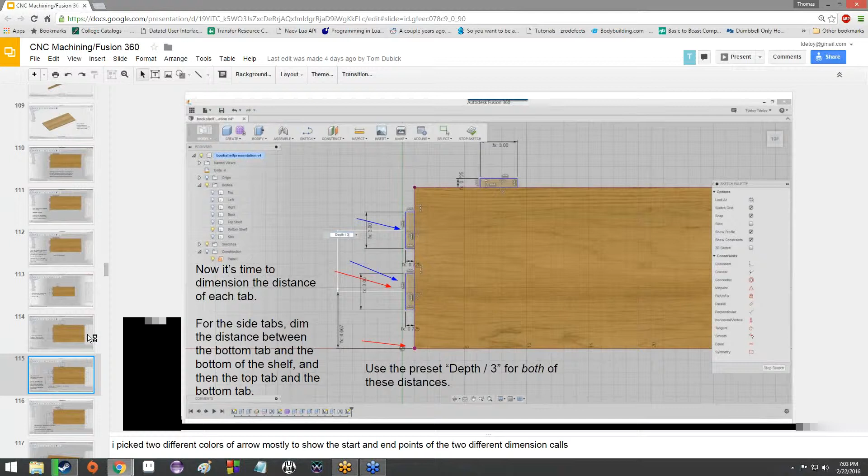And not just that, we mirrored it and we created the back tabs and the side tabs and brought out the things and cut all the holes. It was quite the ordeal.

As you can see, slide 160 exactly. There's a lot of slides in this presentation, and it's not entirely done yet. So it's like 240 so far. There's a lot to making this bookcase and getting it ready for cutting and everything. But it's mostly just because there are so many new concepts that are introduced.

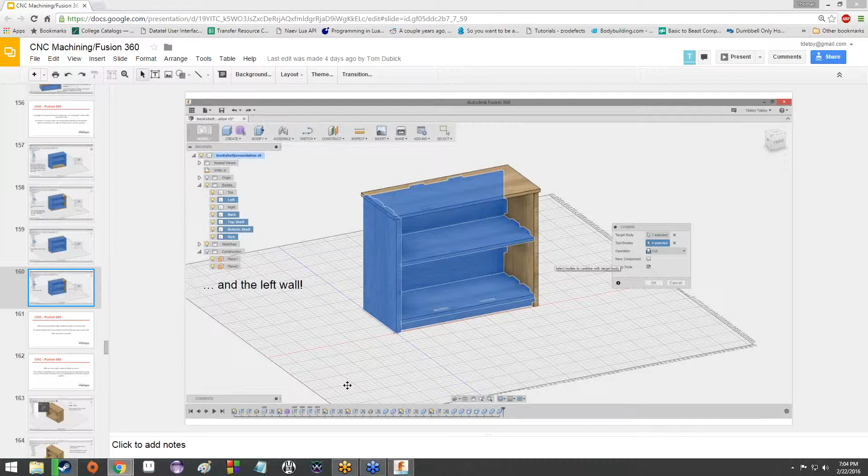All right. Fusion is almost started up. So once it does, eventually, we'll go ahead and open up the project we've been working on.

All right. So let's see here. We should be. Oh. It seems that mine did not save.

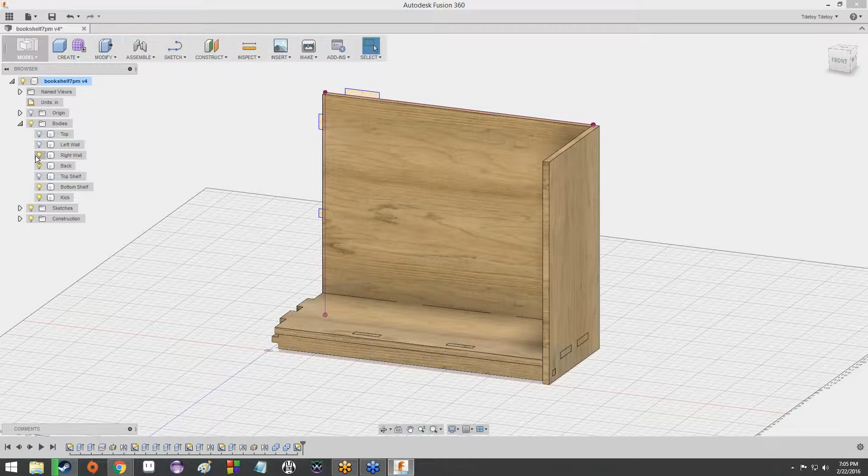All right, well, this is a good opportunity for a review. Let's see here. Looks like we don't have the back tabs or the side tabs on mine. Or I don't have the back tabs or the side tabs. I shouldn't say that about you guys. I don't have back tabs or the side tabs.

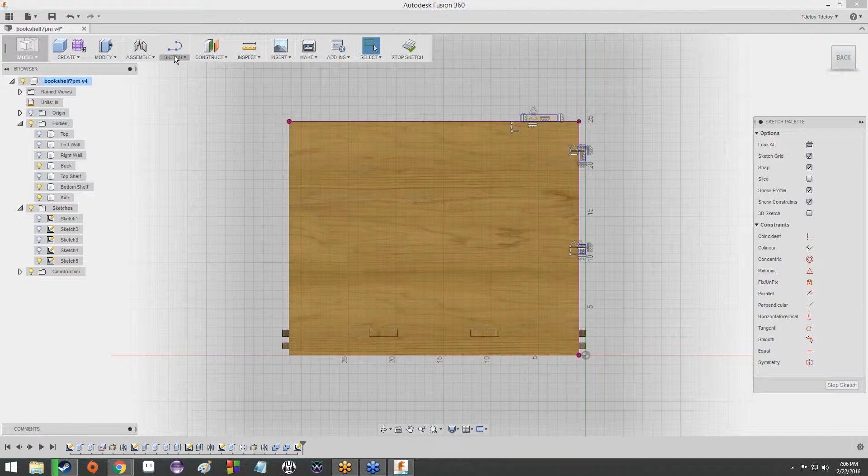Okay, well, let's spend some time reviewing. I can show you guys exactly what we did. So we'll dimension this stuff out as quickly as I can.

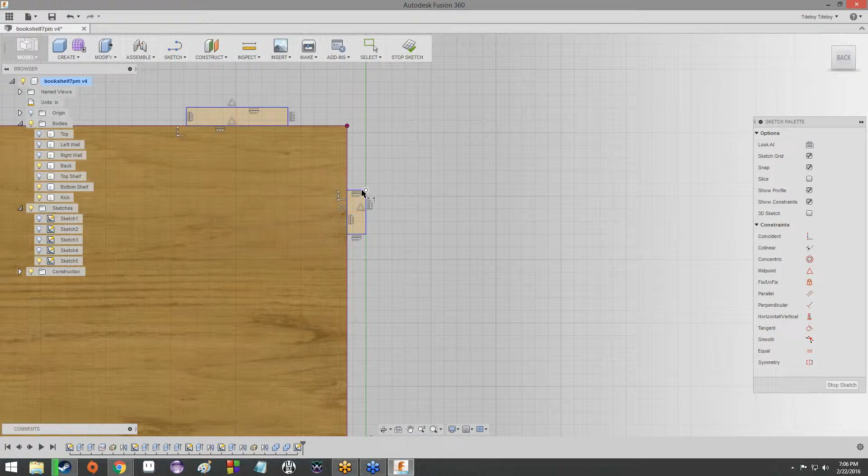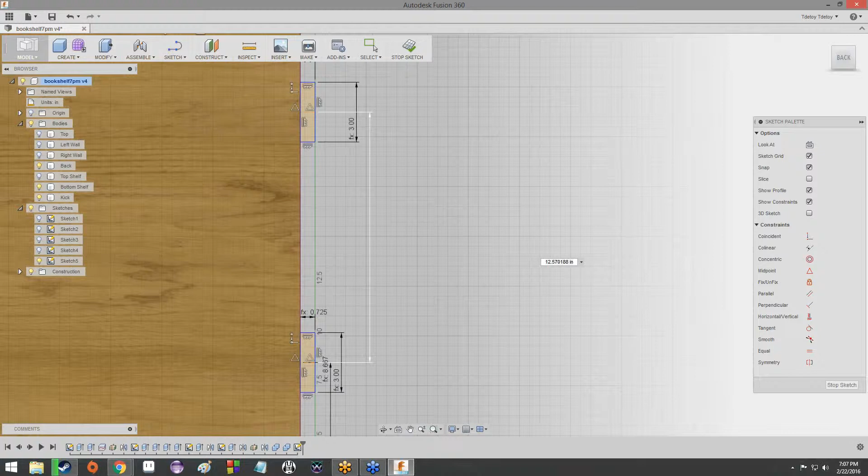All right. So remember that our tabs have, for the most part, been ply in their length. No surprise there, and they've also been tab in their width. With a lot of these, we've made them some distance away from each other. Usually it's the dimension that they cross. So like in this case, these are along the height of the bookcase. So in this case, it would be height divided by 3, like so. So these are height divided by 3 far away from each other, far away from the bottom, far away from the top, and they've been ply in length and tab in width.

Didn't really anticipate that this was not going to be saved. I apologize. So same deal up on the top. This one was tab in width. However, this one was blind tab in height. Because remember, we wanted it to be sort of sunk into the top, but not enough that you could see the tabs on the top. And then this was width divided by 3. Remember, this runs along the back of the bookcase, so we're looking at the width of the bookcase along this dimension right here, whereas this is the height of the bookcase.

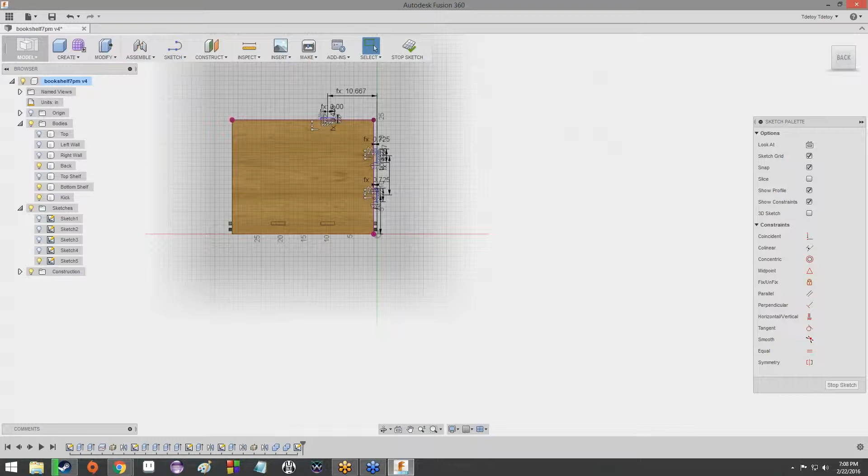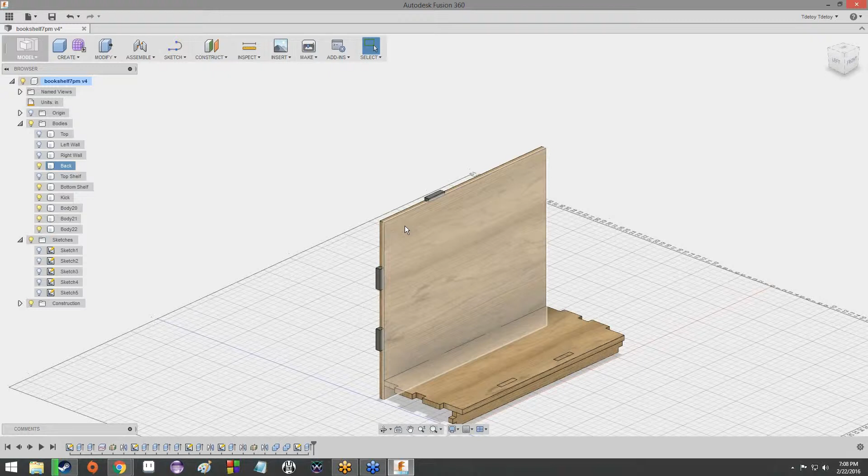And then after we did that, we just went ahead and extruded those tabs out to the other side, made them a new body, hit OK. So as you can see, the tabs now exist. Let me just go ahead and hide the other bodies. So the tabs now are here.

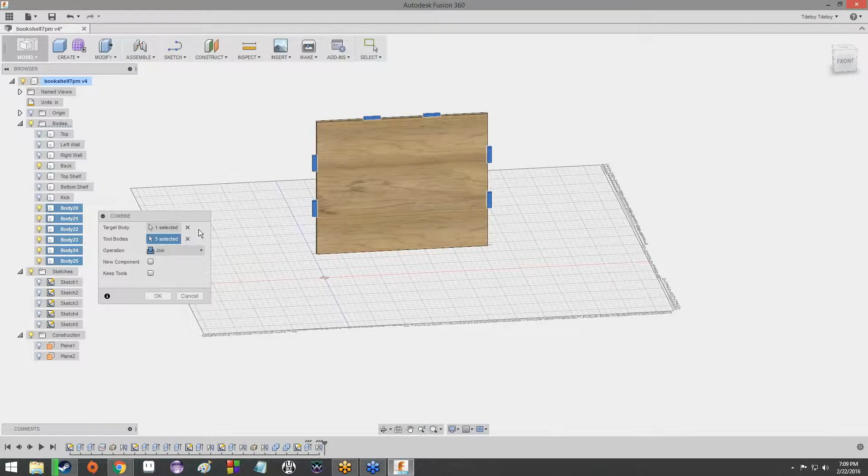And it was simply a matter of mirroring them over the other side. Mirror, mirror, mirror plane, we'd select the construction plane up here. They got mirrored onto the other side. And then, once that was done, all we had to do was just combine them. Whoops. And then join. Just like that.

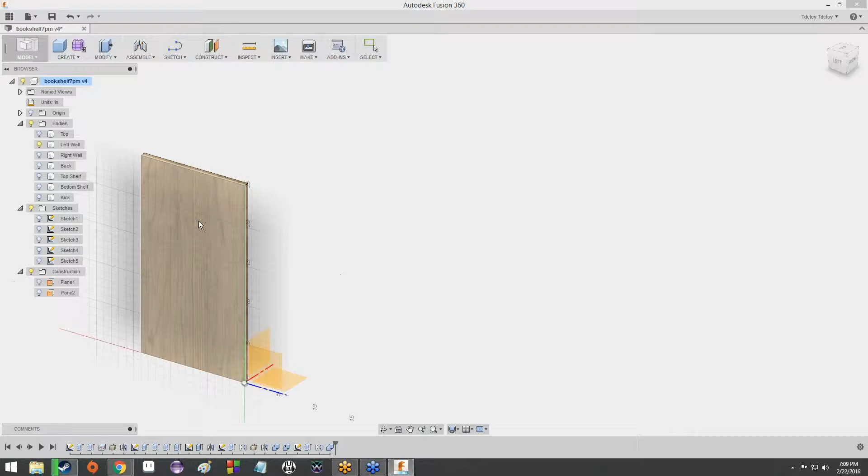And that was how we did tabs on things like the back. So if we were to do this left wall right here, because I still have to do that since it didn't save it, creating a new tab was simply a matter of creating a new sketch, drawing on some rectangles, as well as some midpoint lines, until I've done this a couple of times.

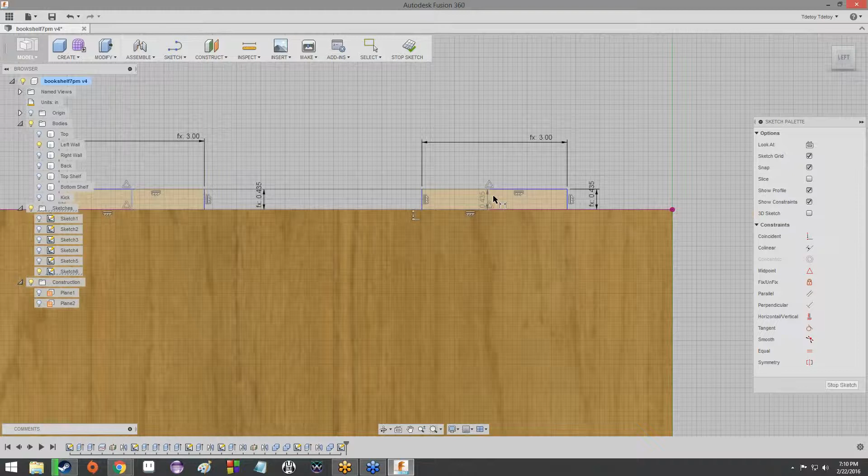Turning these into construction lines, and then dimensioning them appropriately. Well, if you remember, these were also a height of blind tab, because these are going into the top, and a width of tab. Now these were a distance of depth divided by 3 from one another. Because remember, this is the front of the bookcase over here, and then this is the back.

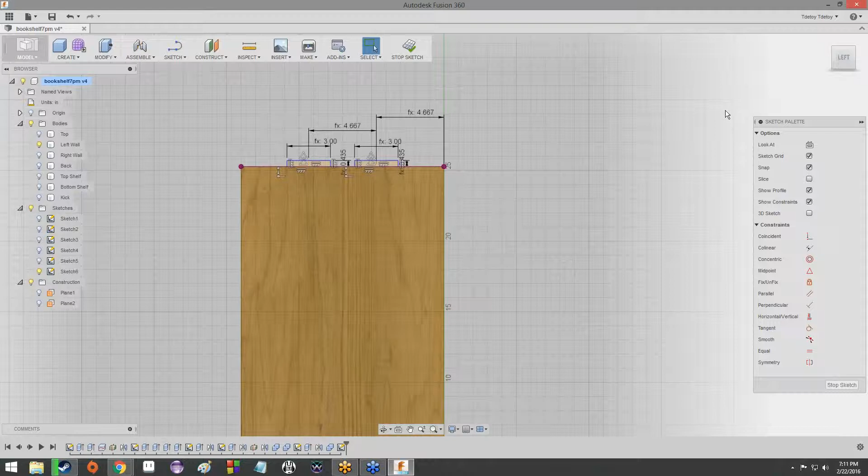And then thanks to the mirror function, we only have to extrude on one of these. So let's go ahead and extrude these 2 over here. Make it a new body, hit OK.

I apologize, this is probably not the most exciting thing. I didn't realize that it wasn't going to save.

Mirror these objects across the midplane, hit OK, and then combine them.

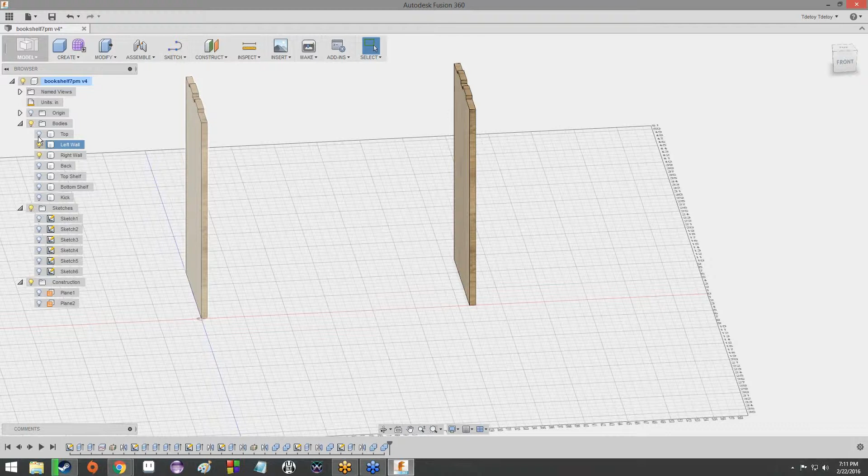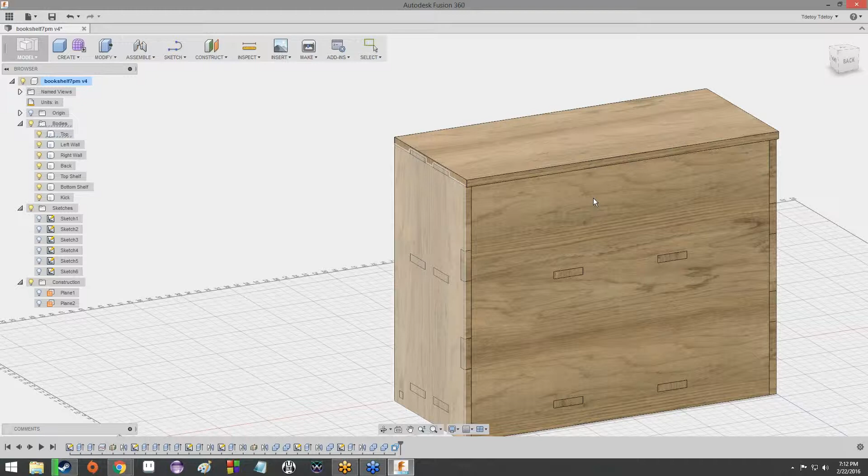And then once we created all the tabs, because that was all the tabs we have in this thing, remember there weren't actually any holes here, so there was material overlapping at these points. So first things first, let's go ahead and do a little bit more push-pull, press-pull. And it was 1/2 inch, so that we had some extra material to work with.

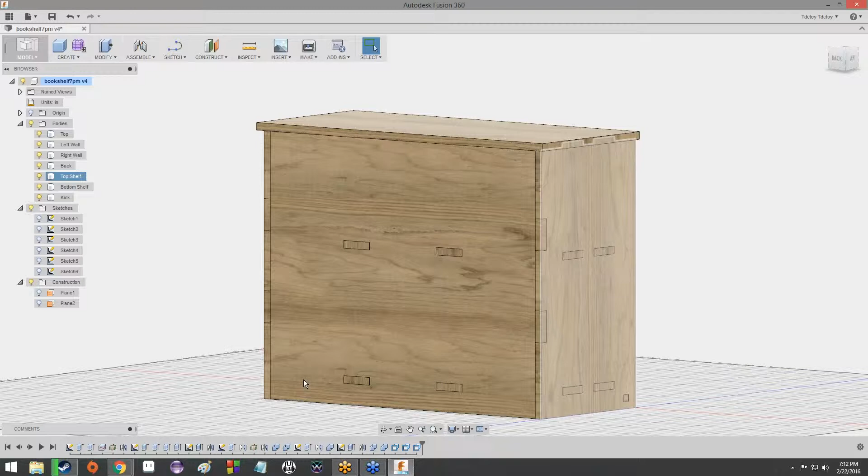And with that done, all we had to do was cut out the holes. Now, cutting out the holes, if you guys remember, was done with a combine function. However, it was a little bit wonky how we did that. You notice how we've got operation down here, we changed it to cut. So the target body in this case would be whatever is getting holes cut out of it.

So the target body here would be the bottom shelf, if we wanted to cut the holes for the kick plate out of it. Tool body in this case would be the kick plate, and we wanted to make sure we kept the tools so that the hole would be cut.

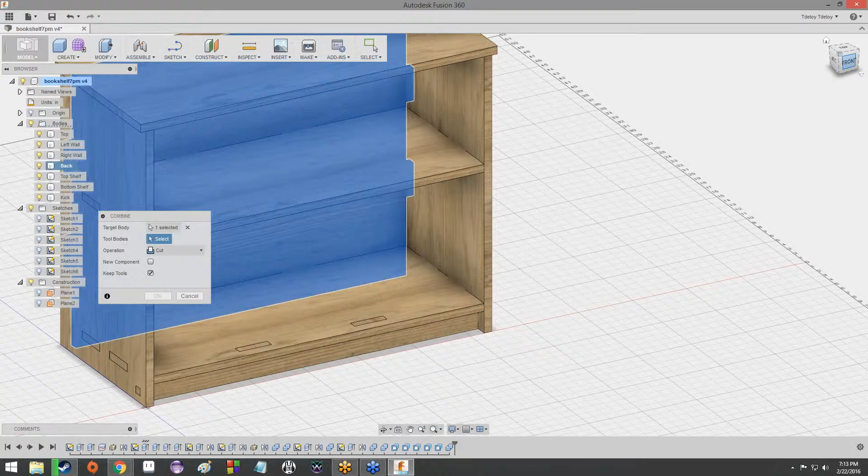Now if we were to hide the kick plate, you can see that there are holes cut into the bottom shelf because we used that cut command. And then that process was simply repeated across everything that cut holes into it.

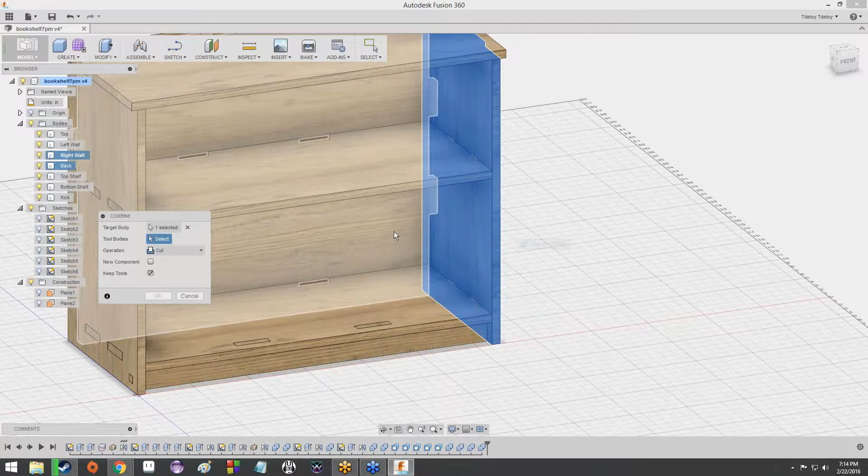Okay. Okay. Okay. Oh, whoops. Right. And then finally.

Okay, so now let's double check everything. If we did everything right, if we hide some of these areas, we should see that there are now holes in them, and there are.

So let's hide everything except for the top. Top has holes in it, perfect. The left wall and right wall have holes in them. The back has holes in it.

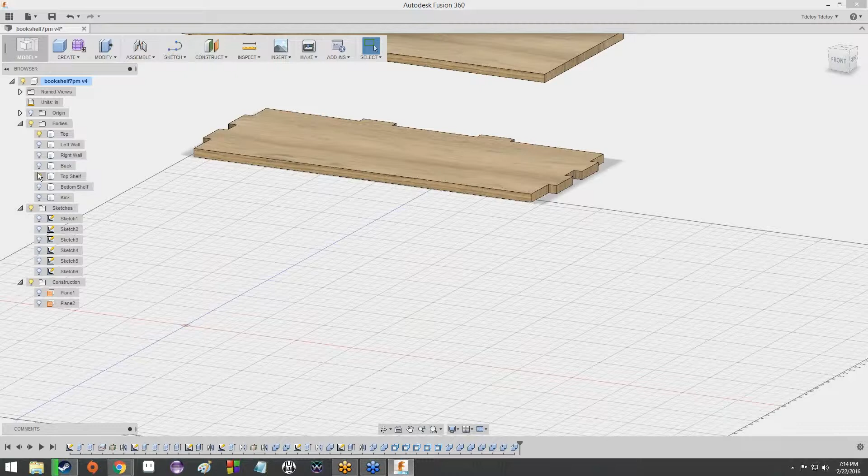The top shelf shouldn't have holes in it, and it doesn't. The bottom shelf has some holes in it, and the kick does not have any holes in it, which it shouldn't. So perfect. Now, with that little crisis averted, we can actually move on to the stuff we're supposed to go over today, and that is continuing along with this bookshelf.

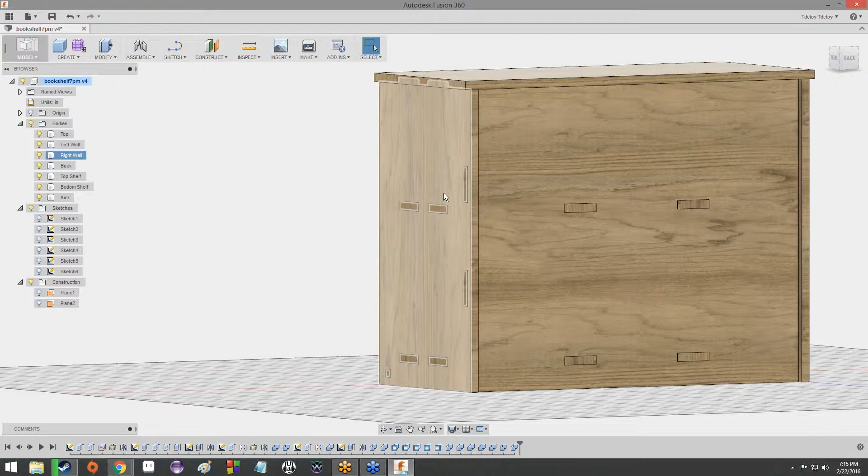Now, the bookshelf has exactly the tabs and the slots and everything it needs in order to be constructed. However, we need to set up the means for it to be cut out of material. That involves laying it flat on some stock, creating a stock for it to be cut from, as far as modeling is concerned, and setting it up so it's all ready to go.

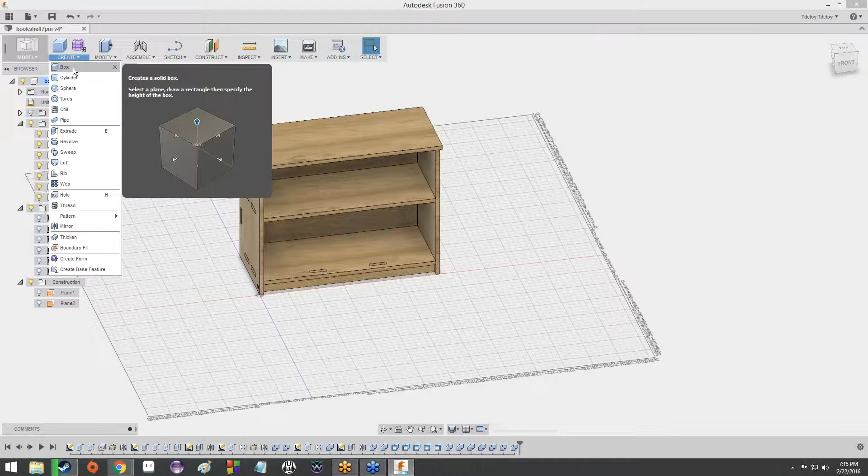So the first thing we're going to do before we do anything else is we're going to create a box. Let's go ahead and go up to Create, and then Box.

Now, just like everything else, we've got a bunch of planes we can select from, as well as the actual drawing planes here. We're going to select this bottom drawing plane, because we're actually going to be drawing it on what you can imagine is the floor that this bookshelf is sitting on. It's not going to be a part of the bookshelf at all, not yet. We're going to make it though, but it's going to be drawn on the floor.

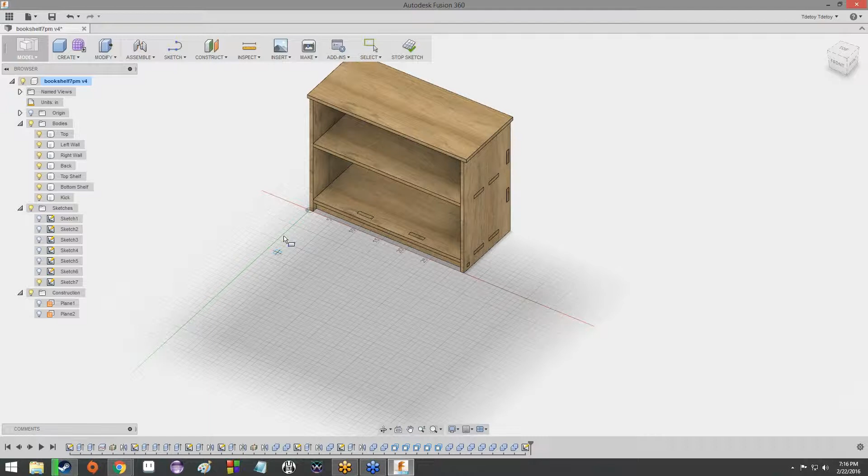So there, as you can see, the little box drawing tool is on the bottom plane. So we're going to start at the origin, and then just draw it out some. Again, it doesn't really matter how far out you draw it or anything like that, because we're going to worry about that in a moment.

Okay, so here's the thing we need. The length, in this case, is going to be 48 inches, so you'll notice it resized itself to 48 inches. The width is going to be 96. Now, based on the thickness of all these faces and stuff like that, all these walls and shelves and things like that on the bookshelf, what do you think the height's going to be?

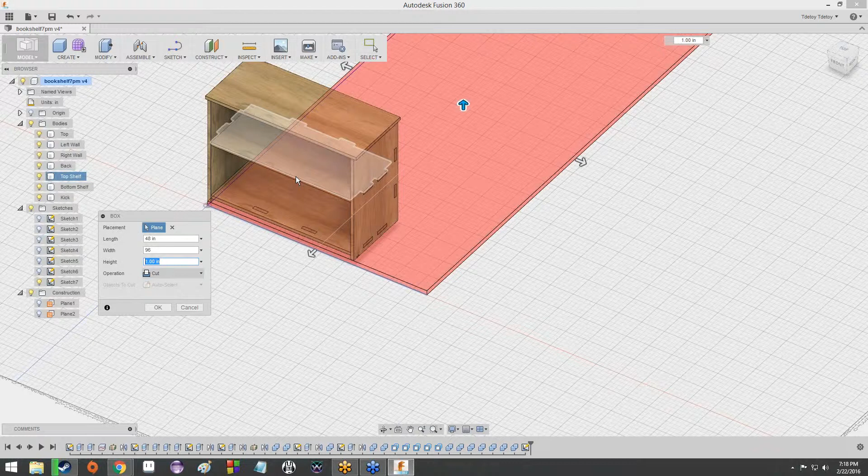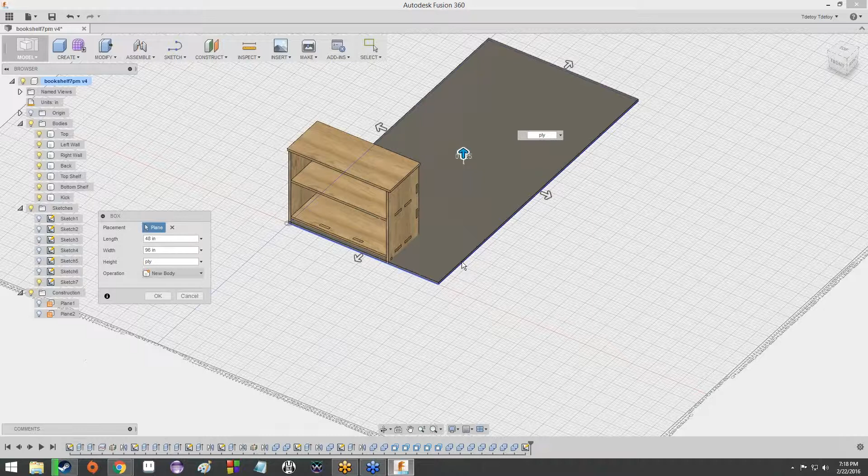Now, before you hit OK, we want to do one more thing. The operation in this case is going to be new body. So we've got a length of 48 inches, a width of 96 inches, and a height of ply. The operation is new body. Just hit OK. And there you go.

Now you got this nice gray thing, and then the bookshelf looks like it's kind of disappearing into it, especially when you zoom out a little bit. But this box right here, this sort of weird flat box, represents the stock that we would be cutting this bookcase out of, and then subsequently assembling.

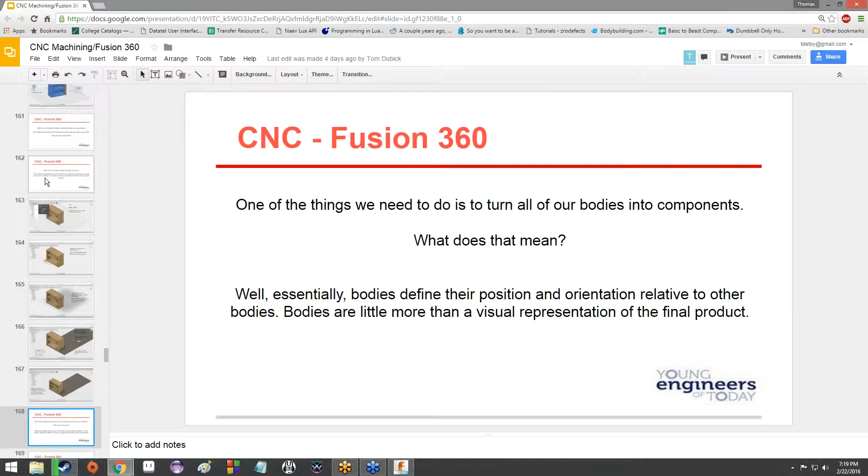So now what? Well, first off, we need to turn all of the bodies that we have. So if you remember, bodies are all the little model representations of each individual piece. We need to turn all of these bodies into components. What's the difference? Well, essentially, bodies you can consider as static things. Bodies are simply just representations, three-dimensional representations of an object. On the other hand, components represent parts, just like their names imply. They represent parts of a larger whole, and you can do more with components than you can with bodies.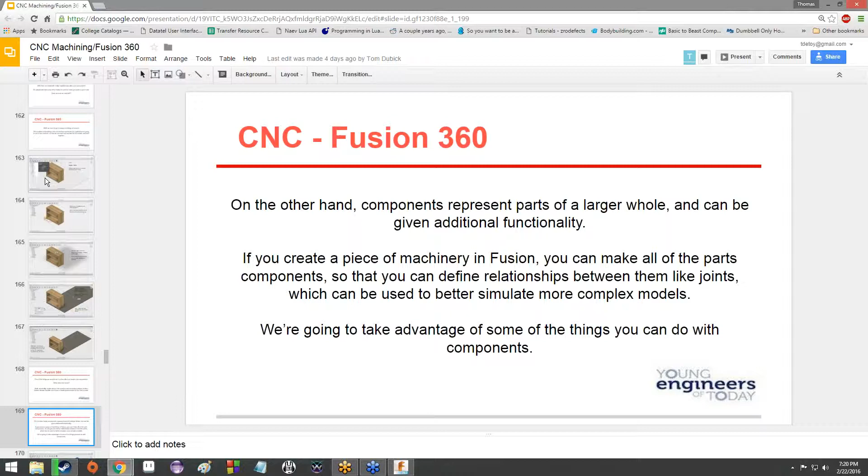So like if you were modeling a piece of machinery in Fusion, you can make all the parts components, and you can give them joints and stuff like that, so that you can say, oh, this particular piece rotates around this other piece, and then it hits this piece and blah blah blah. So you can get a better idea of how everything's meant to fit together as maybe a piece of machinery or something like that. We're going to take advantage of the fact that you can create more complex relationships between components than you can bodies, and use that to help create our bookshelf in our stock.

So what we're going to do is we're going to select everything. Just click the first one, hold down Shift, click the last one. So now all of our bodies are selected. And this is in the browser, by the way. So under our list of bodies, I clicked top and then held Shift and clicked body 30, and so all of them got selected. Now I'm going to right-click on one of them. Get this little right-click menu. There's one option right here, create components from bodies. We're going to click that. And it's going to spend some time thinking about stuff.

Uh-oh. The website. Student. I was afraid that was going to happen because we have been going over this for a while. There you go. Should be able to do the student account thing and everything from there, and then get Fusion 360 at least activated. You may not necessarily need to re-download it. Once you create a student account there, you can log in using that student account, and it should continue to run. And this is being recorded, and we'll have sound, so we will be able to put it up.

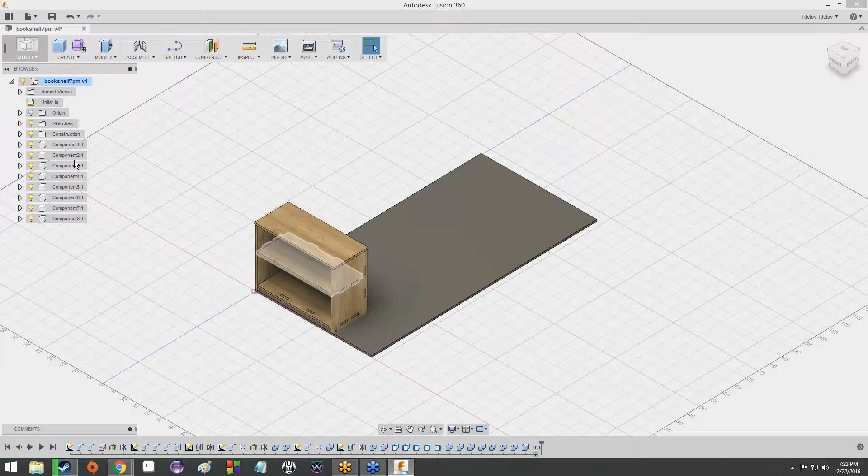All right, so create components from bodies. That's what we just did. No problem. Hopefully we get that up and running. You'll notice that all of the bodies have disappeared from the browser, and now we got a whole bunch of components. We got component 1, component 2, component 3. Wow, it gave them really unhelpful names again. So let's go ahead and rename those again to helpful things.

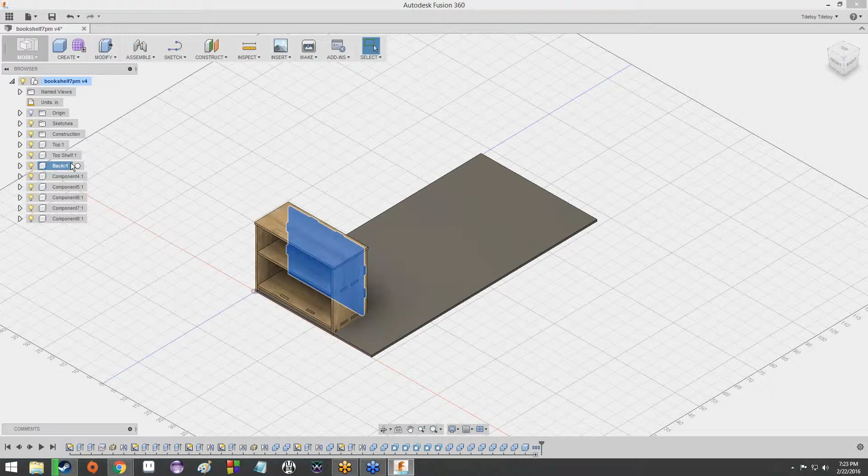So I'm going to double click, and it should give us a new text box so we can rename it. We know this one is the top, so I'm going to rename it top. This one is top shelf. This one is the back. This one is the left wall. This one is the right wall. Oops, nope, that one's the kick plate. The importance of naming things. That one's the kick plate. This one is the right wall. I made an assumption there, and I shouldn't have. This one is the bottom shelf. And then this one is the stock.

So now we've got them all named: top, top shelf, back, left wall, kick plate, right wall, bottom shelf, and then stock. And you notice that there's that colon and then the 1 after it. That'll just be there. That's okay. Don't worry about it. It should be there. That's part of how we know it's a component, among other things. But anyway, they should be renamed to more helpful things now. And if they are, fantastic.

So now what? We've got components. We've got them named helpful things. We need to somehow embed this stuff into this stuff. Well, I'm glad you asked.

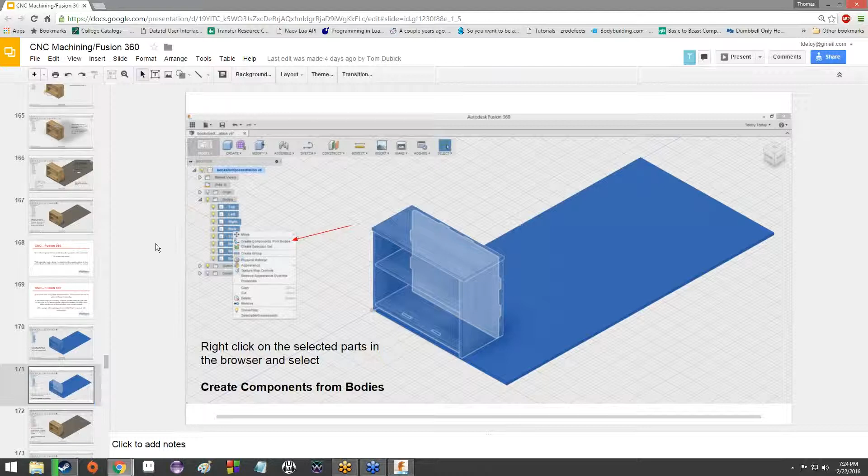Well, we're going to do one thing first. We're going to make sure that the stock doesn't move anywhere. We're going to do that by right-clicking on the stock in the browser. And you'll notice that there are a few things here: activate, ground, move, new component, create components from bodies, blah, blah, blah. We're going to select ground.

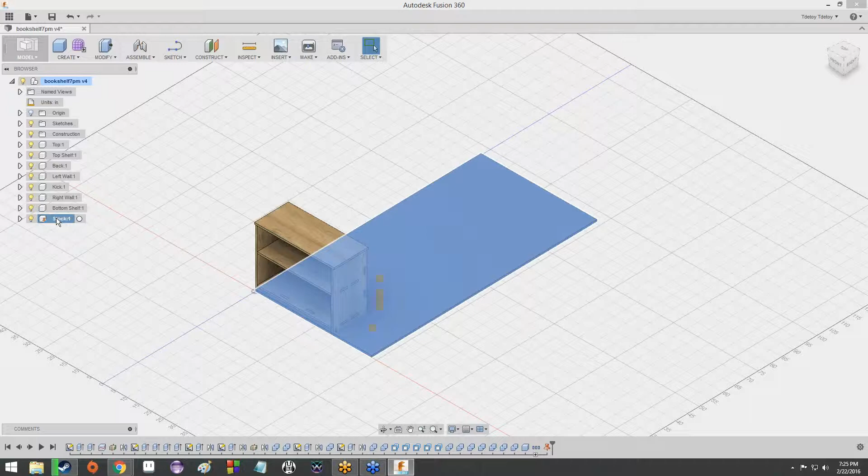You'll notice that if you look at the stock in the browser, there's a little pin in its icon, and the stock is also a darker color. Well, no, it's a darker color because I moved my cursor away from it. But regardless, there is this pin right here next to the cube in stock's place in the browser. That means that it's not going to move anywhere anymore.

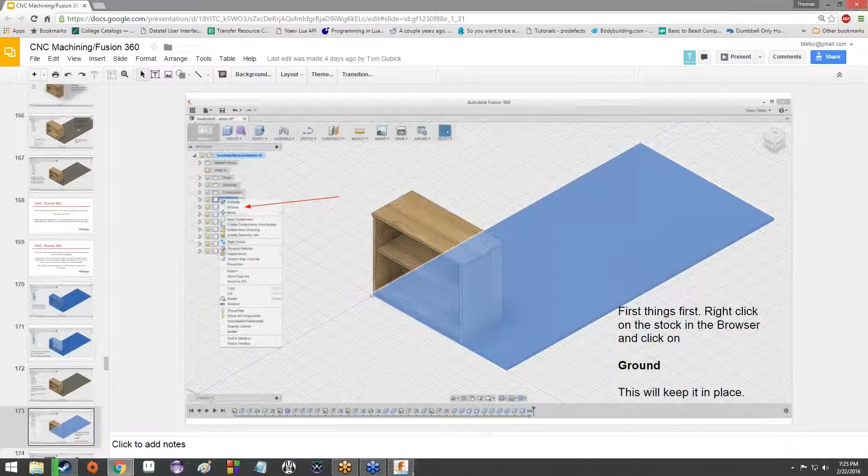We can't accidentally pick it up and move it around and place it somewhere else, because we don't want it to, for a few reasons you'll see in a moment. And it also kind of makes our life easier when working with this. So cool. Now we've got the stock grounded. It's not going to move anywhere. Now we can start putting stuff onto other stuff. Hopefully that was vague enough for you.

So once we grounded the stock, we're going to go up to Assemble, and then Joint. What does this do? Well, basically what this does is this makes one component a part of another component. The whole idea behind that is you can help keep things closer together or define a relationship between them, spatially speaking, and a few other things. But basically, we're gonna create parts of the bookshelf as joints of the stock. What do I mean by that? Well, you'll see in a moment.

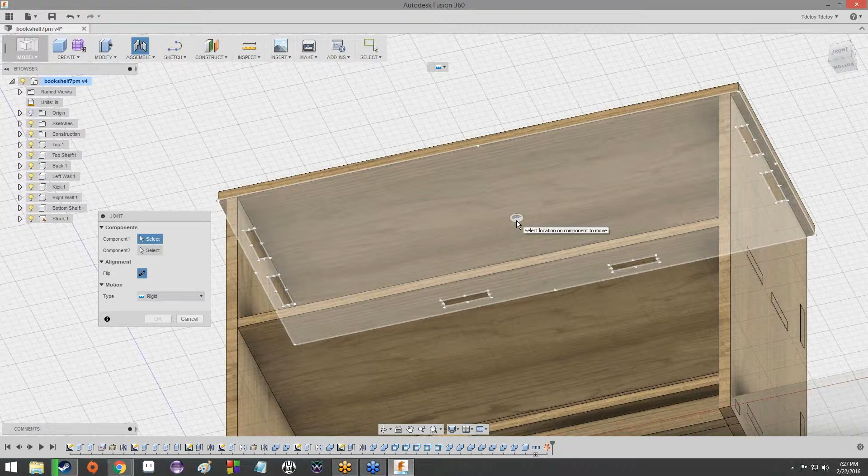So I'm going to go ahead and zoom in, and I'm going to use the bottom face of the top of the bookcase. You'll notice that if I mouse over the center here, this strange little cursor just snaps to it. That's good. We want to use the center of the bottom face of the top of the bookcase. It's really quite annoying. There are so many modifiers on that, but anyway, we're going to use that. Boom. It's going to disappear. We're going to flip around.

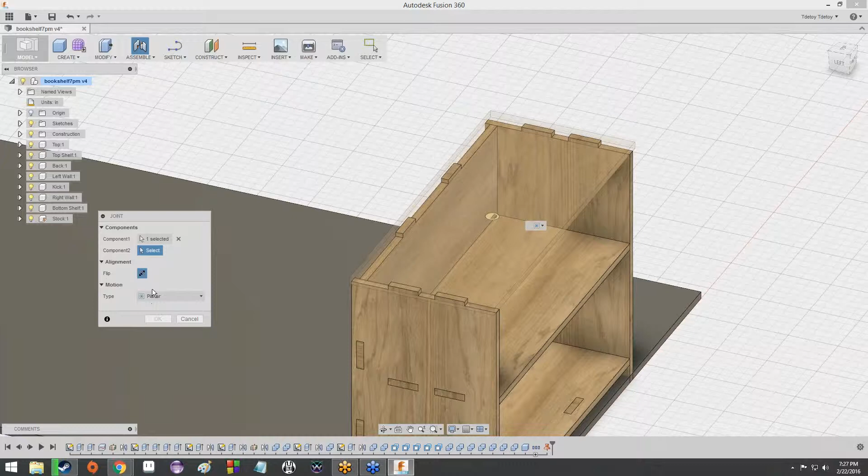Now under type, I believe type is going to be planar. Yeah. Type is a little drop-down menu. We're going to select planar. Now for component 2, go ahead and mouse over the stock. Again, you're going to get the same kind of snap to in the middle of it. Good. We want to use the middle of the stock. Now click. It's going to move down there, and then it's going to wiggle around, be all weird. That's good. Eventually, it's going to find its place right in the middle.

And then we're going to do one more thing. We're going to flip it. So click this little icon right here next to flip, and boom. Now you'll notice that it is embedded in the stock. Excellent. Hit OK. And there it is right there. There's the top of the bookshelf. It looks all weird, like there's all this gray kind of

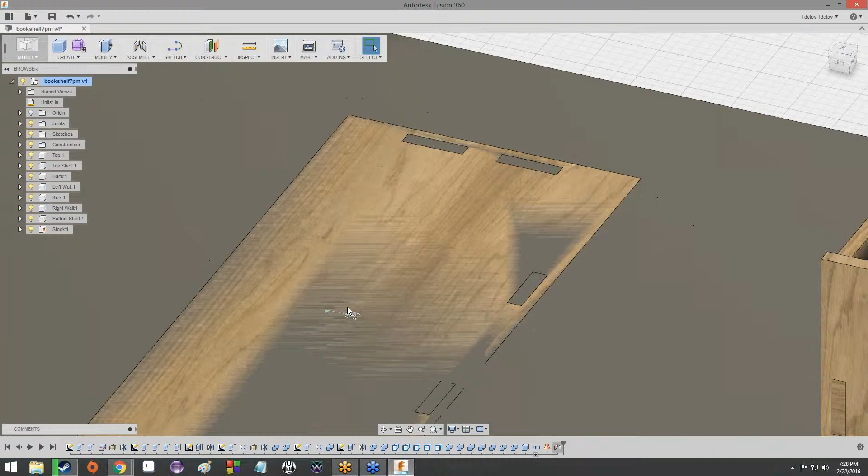phasing in and out. Again, that's because of the Z-fighting thing I was talking about. This particular face of the top of the bookcase is on the exact same plane as the stock, so the computer doesn't know which one to render. If we move it around, you can actually see it pretty well here. You get jagged gray, and it looks kind of weird. Anyway, we're going to ignore that for now, and just click the light bulb next to top in order to hide it. That's exactly what we want right now. So that's one part of the bookcase put into the stock.

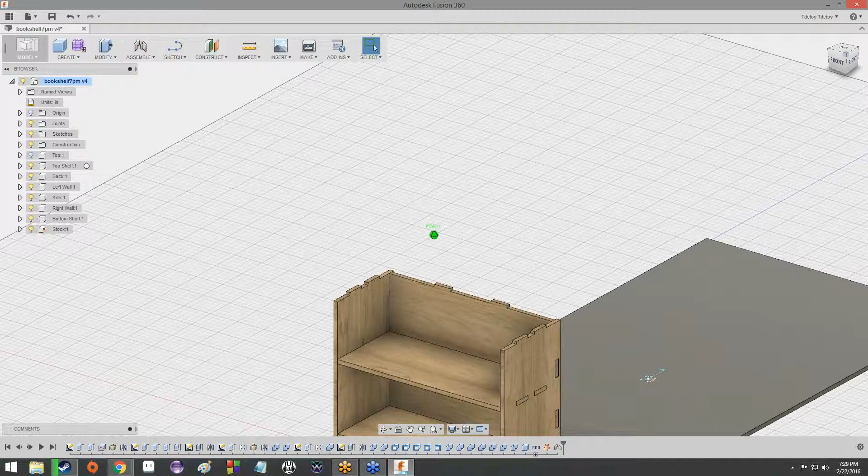Next, we're going to do that with the walls. I believe we use the outside wall. Yeah, the inside. Okay, we'll use the inside. So let's do that process again. Assemble, joint, select the middle of the inside face on the left wall.

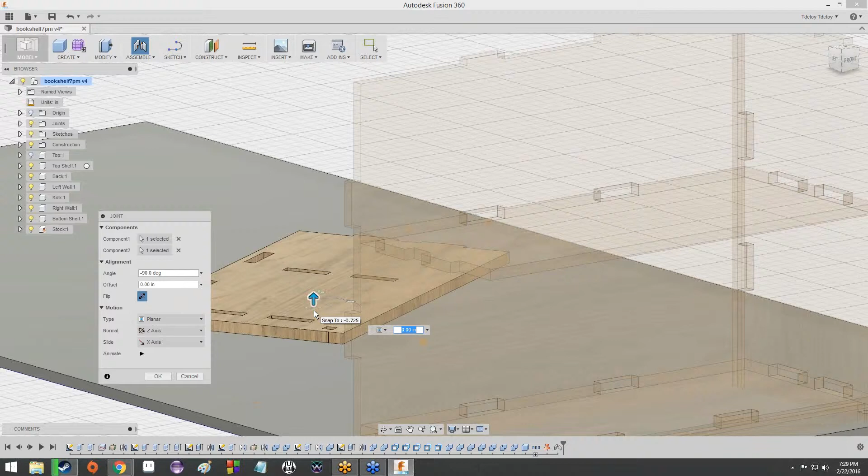And it can be a little bit tricky, so you can just move around the view until you get it, like right there. Perfect. And then select the middle of the stock, and then it'll come down, wiggle around. Once it's done, click flip, hit OK, hide the left wall. Hope you're seeing a trend here. We're hiding the walls, or the bits of the bookcase as we place them in, so that they don't clog up our vision.

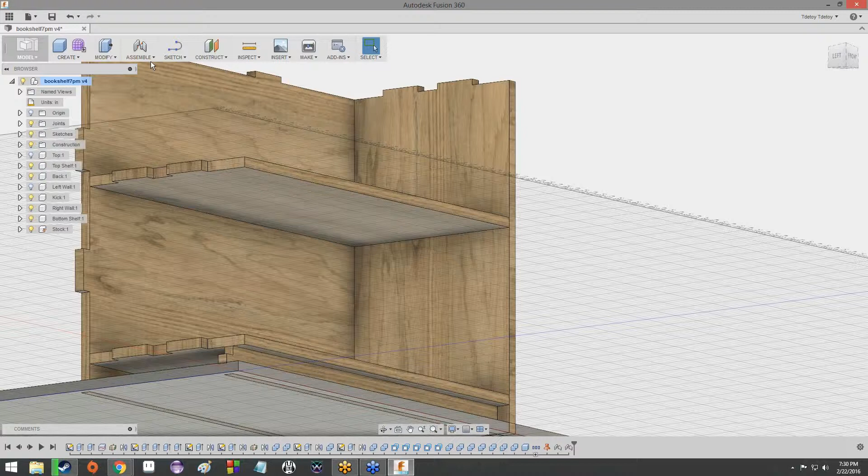Assemble joints, select the middle, select the middle. Again, this is with the inside of the right wall. It's going to move around, click flip, hit OK, and hide. Now let's do that with this top shelf here. Select the bottom of the top shelf. Assemble joints, bottom of the top shelf, middle of the stock, wiggle, wiggle, flip, OK, and hide.

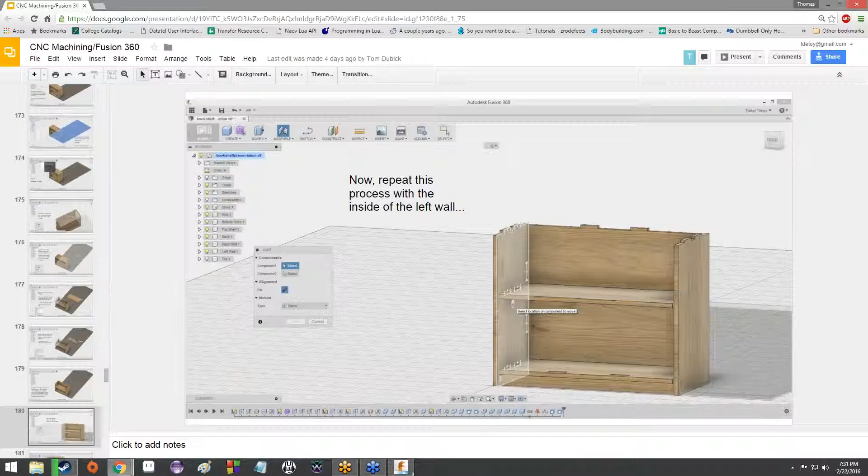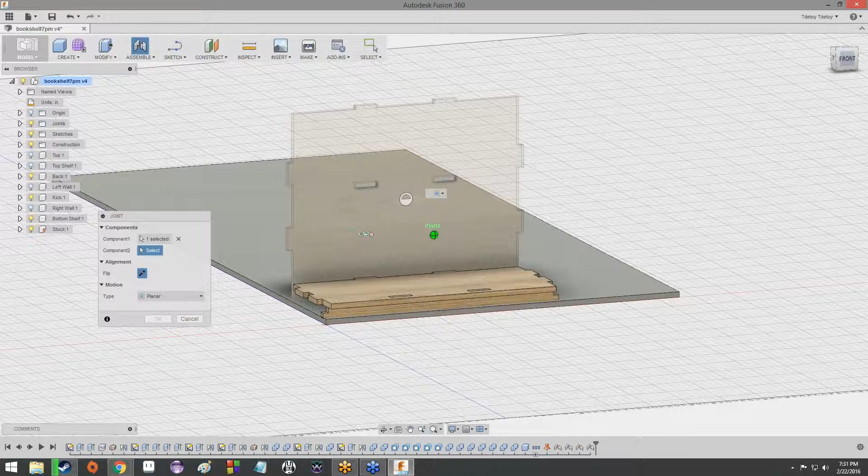Now let's see here, which part of the back we're going to be using. Inside of the back, okay. It doesn't really matter too terribly much, but it's good to keep consistency. Alright, so assemble the middle of the back, the inside of the back wall as well. So as you can see, this is the front of the bookcase right here. Click, go down, wiggle around, click flip, hit OK, hide the back.

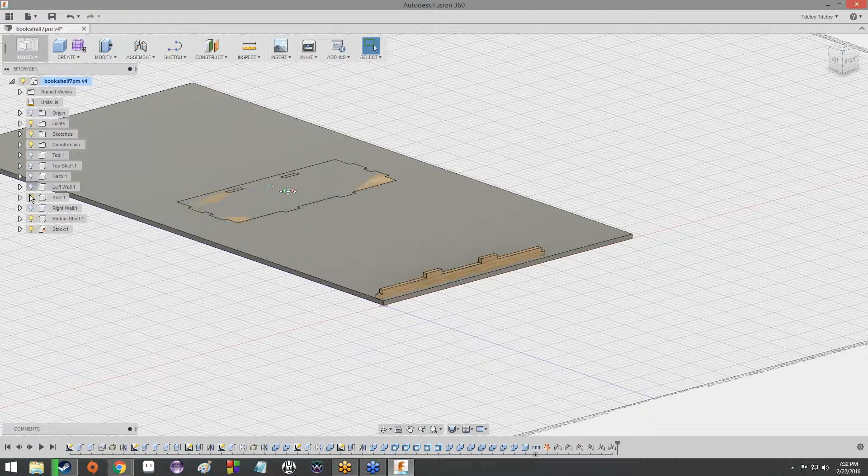Now we're going to do that with the bottom shelf. It's the bottom face of the bottom shelf, which can be a little bit tricky to find, but it should hide it for you. There we go. Click, bottom shelf, wiggle, flip, okay, hide, and then the inside of the kick plate, so the back-facing part of the kick plate. Click, click, wiggle, flip, okay. All right.

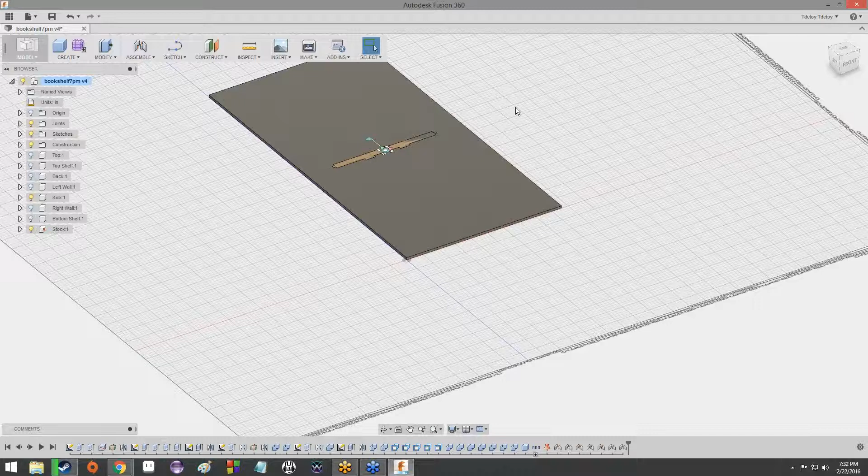Once that's done, we can bring everything back so it's visible again. All in this mess, just kind of all on top of one another. Really not ideal looking. But that's okay, we're going to figure this out. So raise your hand if you're at this point. All right, I got a few hands. Raise your hand if you're still creating the joint relationships. Okay. All right, so far so good.

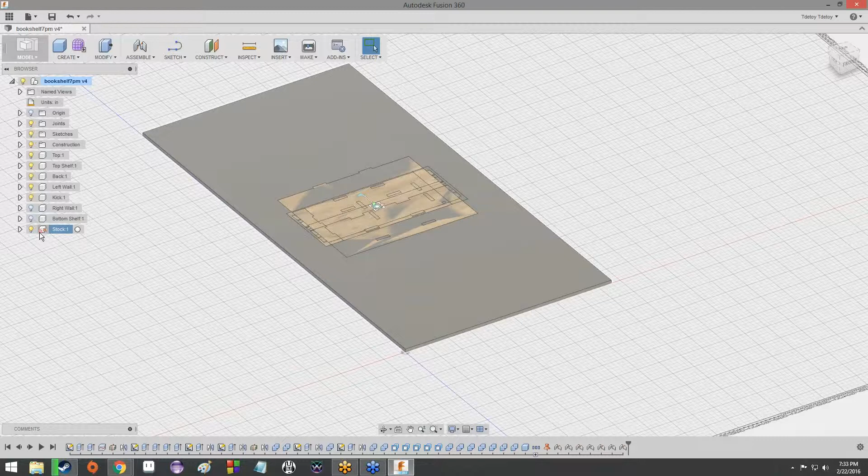All right, so now let's right-click on the stock. And down here there's Selectable/Unselectable. Go ahead and click that. So now, not only do we have the pin icon, we also have this little circle with a slash through it. That means that we can't accidentally click on the stock anymore. It's just no longer selectable, which is good. We want that right now.

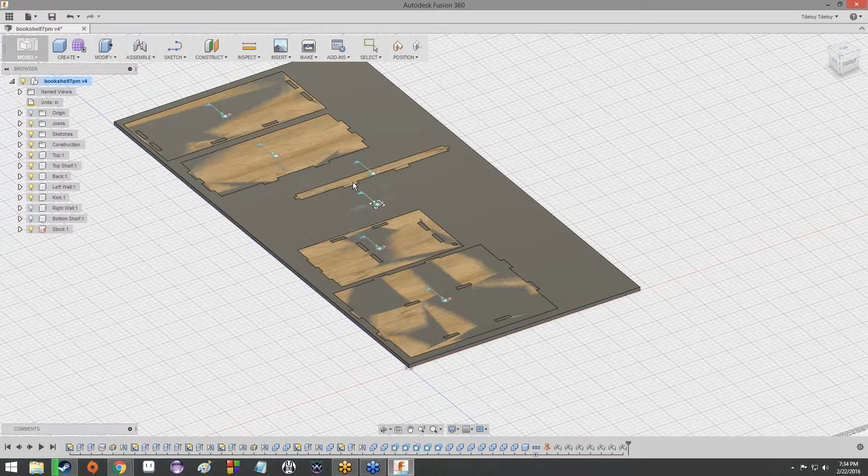Because here's what we're going to do. We're just going to drag these different walls and stuff like that into open areas on the stock. So as you can see, I'm just taking the stuff and just dragging it around. Actually, two of the bits are hiding. That's why it seems so easy. So here we're moving the shelves. Leave a little bit of space along the edge, so there's a little bit of open area. And you'll notice that you're not really able to fit everything in there nicely. Where's this going to go?

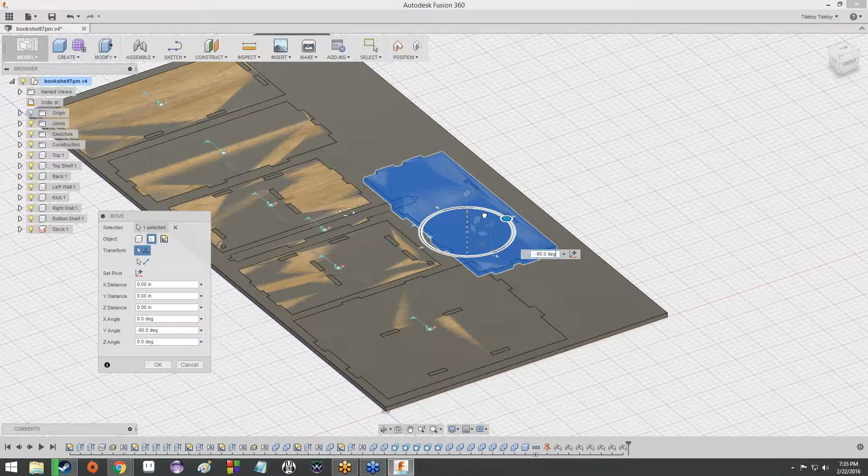Well, I'll tell you. Go ahead and click on a component so that it's selected. And then under Modify, go down to Move. So you should see this little set of controls around it. If you select the flat ring, you can rotate it. So we're going to rotate this 90 degrees. Okay. Now we can drag it to a spot where it will fit. I'll actually do this one as well, just so it's a little less crowded right there.

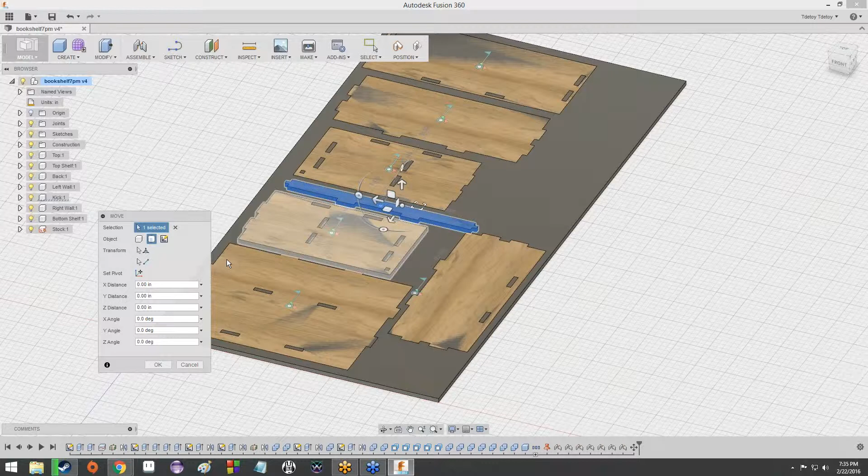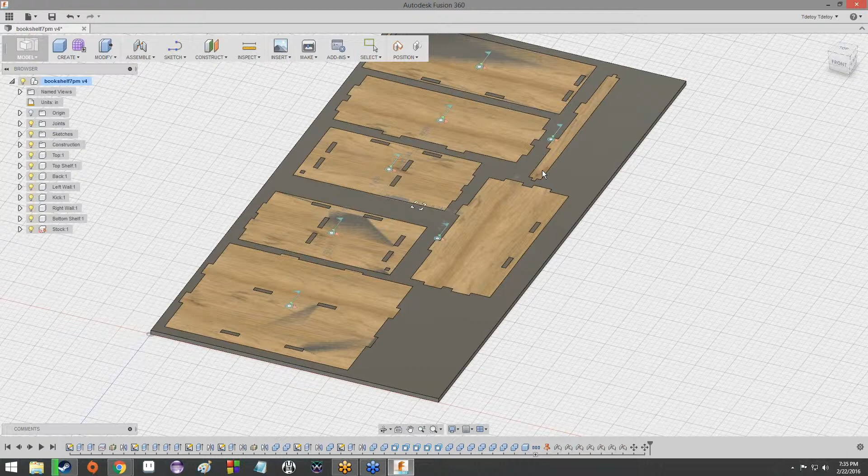Okay. Cool. So with a little bit of wiggling and stuff like that, now we've got all of the pieces laid out on the stock. Excellent. Now things get a little bit more involved. And for that, I apologize beforehand. But let's go ahead and see what's coming up next.

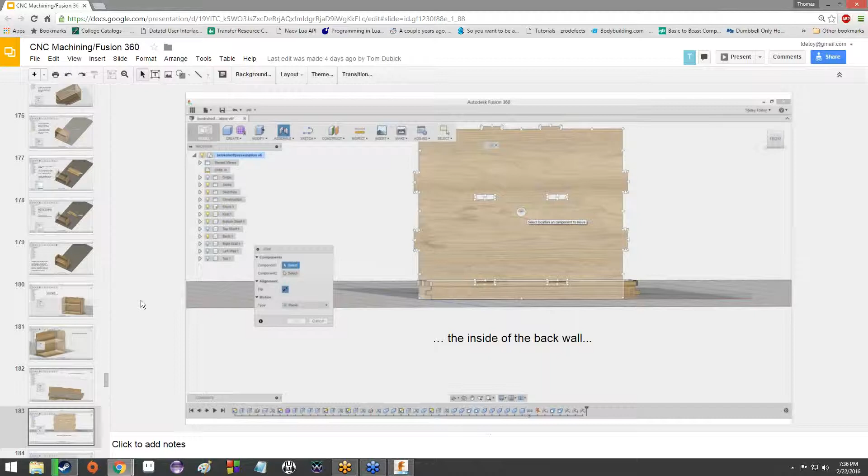So we already did all this stuff, moved it around, no big deal. Now, this is where we are. And as you can see, there's multiple different ways that you can fit everything onto the stock. This is not the one true solution or anything like that. There are a few different ways. I even did it differently in the presentation.

Now, here's the deal. These tabs and their respective slots are not exactly ready for construction. I know I've said that like a million times now, and I just keep jerking your emotions around. Like, this thing's ready for construction. Not quite. One more thing until it's ready for construction, and so on and so forth. There's another thing we have to do to these tabs before they're ready.

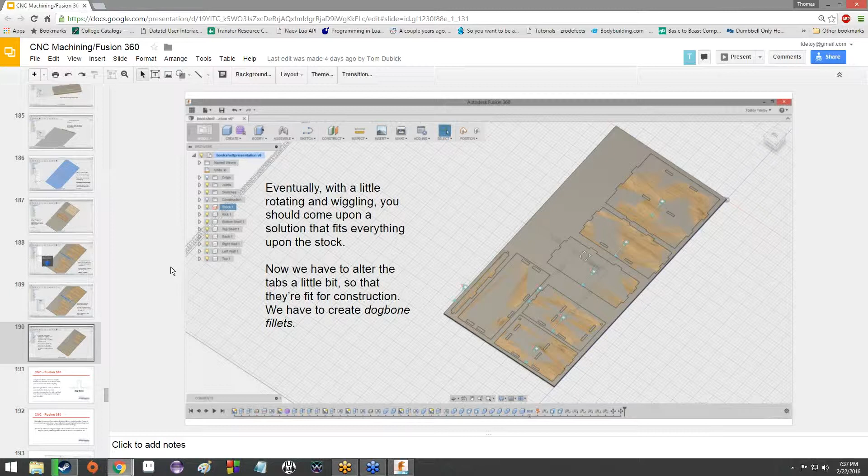And it's just one of these basic tenets of this type of construction to increase the stability and the longevity of the bookcase. And that is to create dog bone fillets on each of these tabs. Now, basically, the dog bone fillet, if somebody brings it up in the future, refers to a style where the corners of the tab are sort of rounded and stuck out slightly. To use this example, this orange line will represent the tabs that we have so far.

And that's what we have. Just simple, straight up and out. So with a dog bone fillet, if we were to go back and look at this right here, let's get a top-down view of one of these.

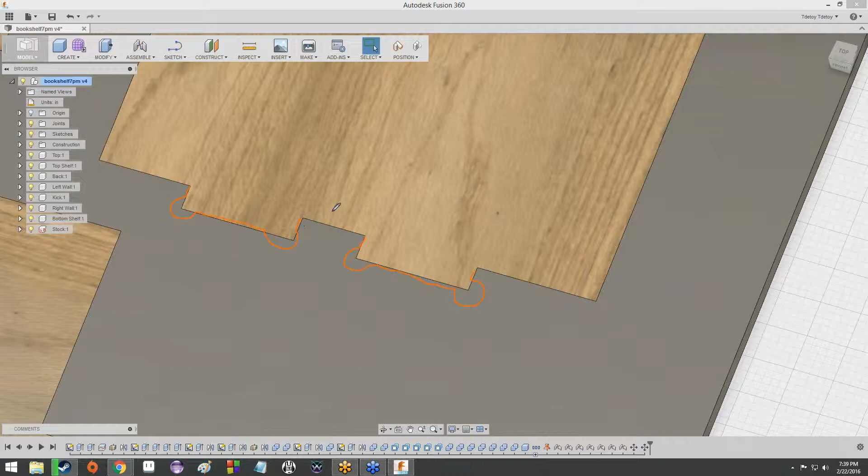What the dog bone fillet is meant to do, or how you would make a dog bone fillet, rather, is you would take these particular areas and you sort of flare out the top like so. And what this does is this creates sort of stronger seatings between the tabs and the slots. Kind of like that, but much neater.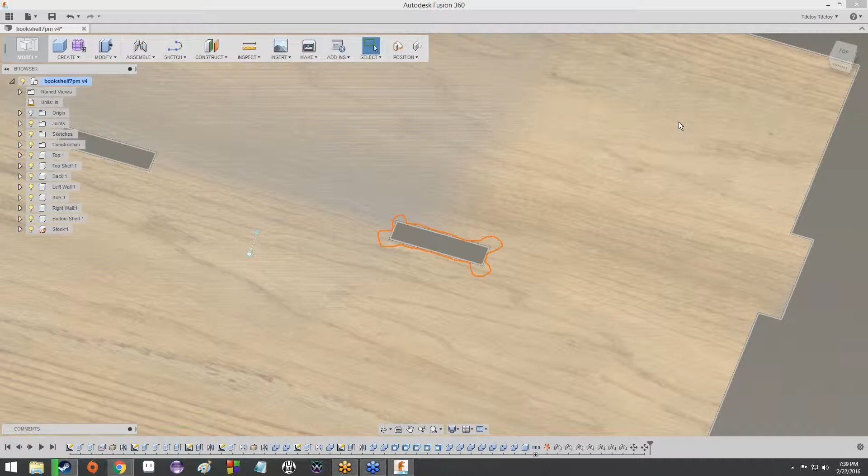And then likewise, there's going to be a little bit of this in here. It's going to look like, well, a dog bone, hence the name. And that's it. That's all. However, there isn't really any way to create those easily built into Fusion. Like, we can't just go, make a dog bone fillet, and it will go ahead and do that for us.

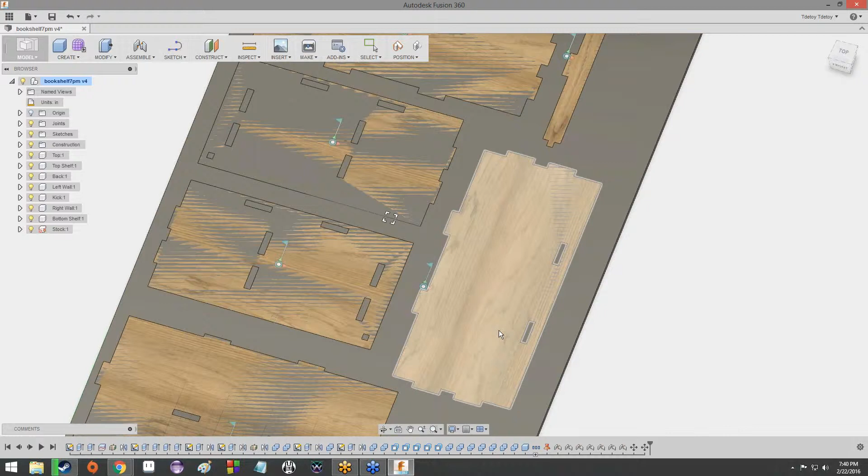Normally, what we'd have to do is we'd have to go on, okay, sketch, create a sketch right here, put in some circles, extrude, join the bodies, and then do that for each individual tab and hole on all of these, which would be amazingly tedious and time-consuming. So we're going to try and avoid that. Okay. Thanks, Fusion. There we go. We're going to try and avoid that.

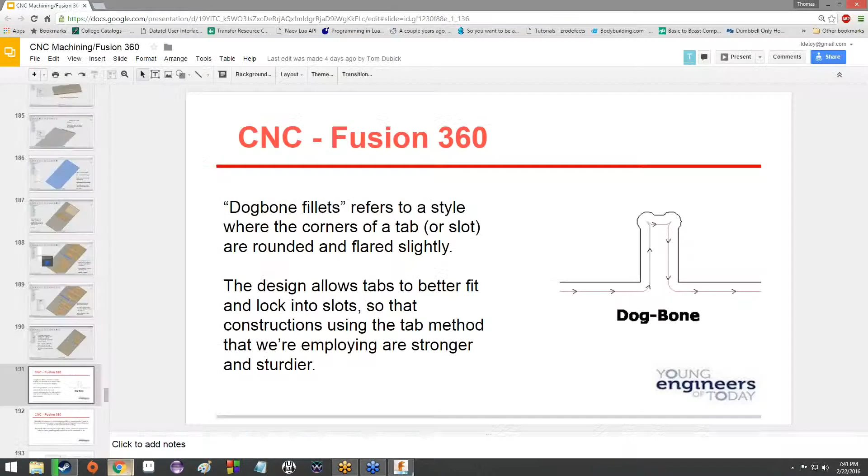We're going to leverage the fact that Fusion has basically the ability to add features to it. You can expand its functionality. And we're going to add a new feature to Fusion. However, it requires a little bit of messing around, but it shouldn't be too big of a deal. First thing we're going to do is we're going to download an add-in for Fusion. Oops.

Copy and paste. I put the link into the chat box. If you guys could go ahead and just open up a new tab in your browser of choice and head to that address. Click on the link and open it up in the browser of your choice. So as you can see, it takes us to a GitHub page. Those of you who were in this class last semester should be pretty familiar with GitHub, at least on some level. Maybe not completely, but you should have seen stuff before.

This is the wonder of the internet. Somebody just made this and then uploaded it to GitHub, and now anybody who wants to use it can use it. So what we're going to do is, once this page loads, you're going to download zip. So there's this button over here. Boom. That's the one you want. You want to download the zip file. Go ahead and click, and it will spend some time downloading. There it is. It should be super tiny, so it should download really quickly.

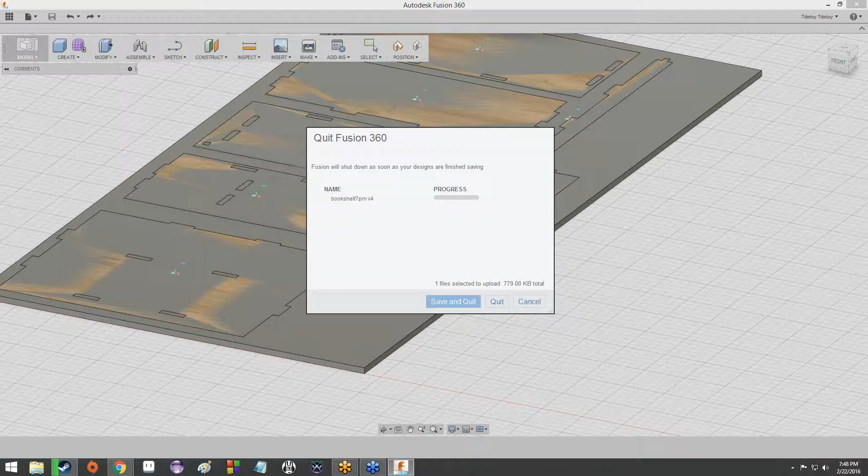It'll think about life and stuff for a minute. Cool. Just reopen Fusion. It's necessary so that Fusion can—basically, every time Fusion starts up, it looks inside of that API folder at add-ins and plugins to see if there's anything added, but it only happens whenever Fusion opens up. So it's not going to see it until we restart it.

So now that we've done that, let's go ahead and open our thingamadoo back up. And it's going to freak out at me. There we go. Close this down.

So now we're going to go up to File, the drop-down menu under File, and select Scripts and Add-ins. It's this one right here. So now I got a whole bunch of scripts listed, and they're all Python. But we're going to click this tab up here labeled Add-ins. Should bring you to another area. Got this little plus sign next to the My Add-ins folder. Hit that.

And it should bring in—you should see the Dogbone Master folder here. Open that up. I guess it's got two levels. And then there's the Dogbone.py here. Select that and hit Open.

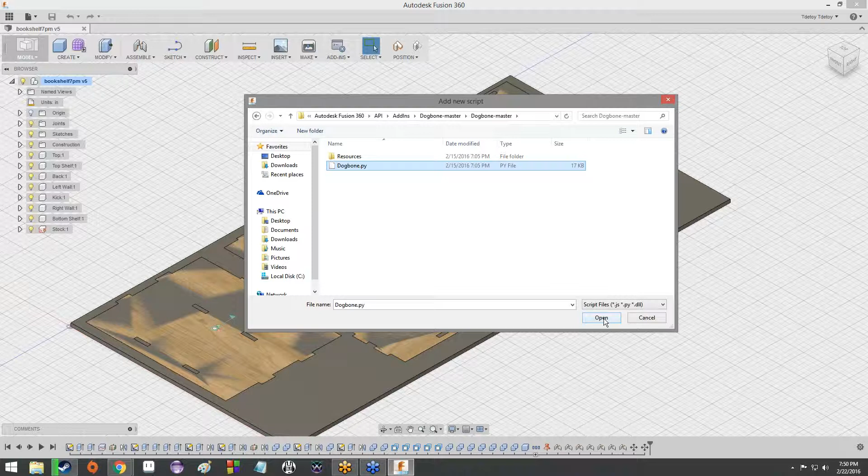And you should see the Dogbone listed right here, somewhere in this list of add-ins. Mine is about third down because it's all alphabetically listed and I don't have any other ones. So you should probably be in the same place, but we shouldn't ever assume anything. So you should see the word Dogbone here though. Just go ahead and select it and then hit Run.

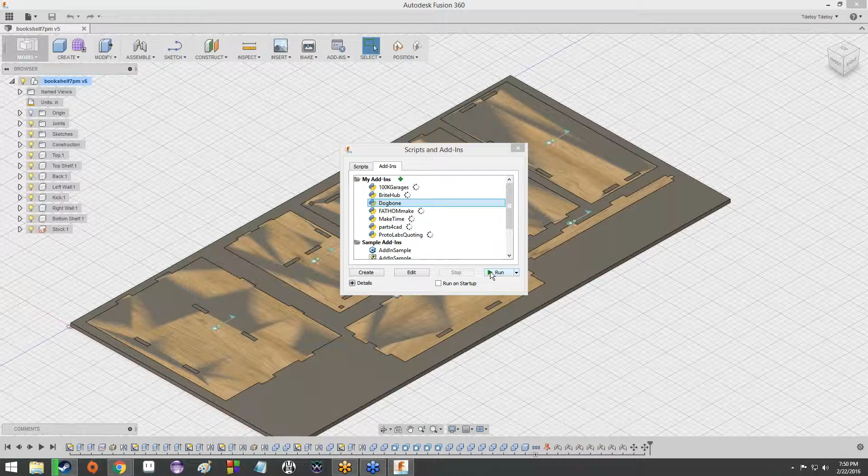And you'll notice not much has changed. However, there is a new icon up here, and that new icon is our little add-in. It's the Dogbone add-in. So now we can mess around with the Dogbone fillet.

One more thing we need to do before we can start the Dogbone fillet: go ahead and select all of your components. Right-click and ground them.

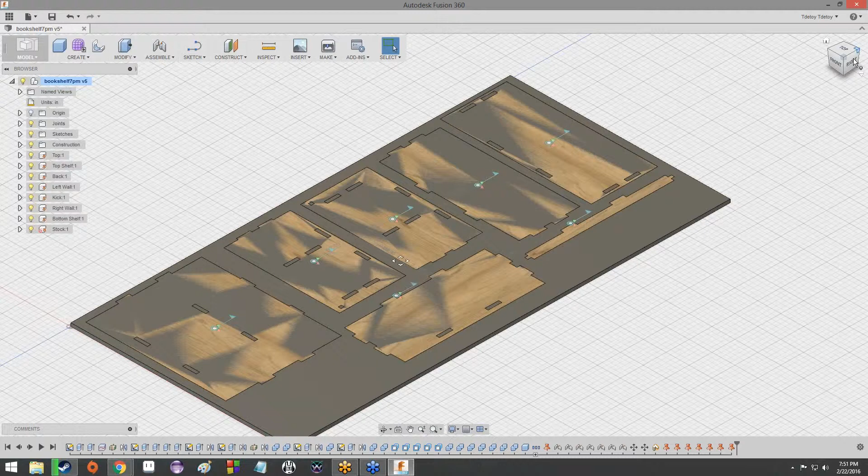So there, now they're all in that position where they should be. Well, whatever position you put them in, but they'll stay there, which is the important thing. Now what I'm going to do is hide the stock so that all we see are the parts of the bookshelf. Excellent.

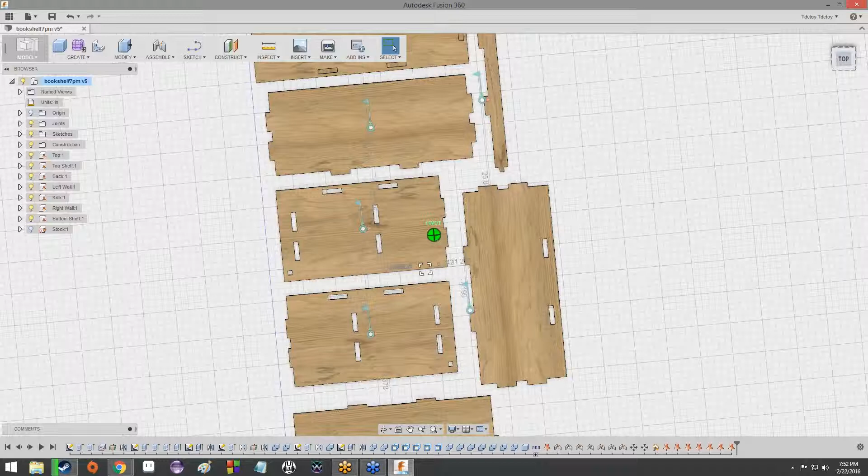Finally, once that's done, I'm going to click on Dogbone up here. It's going to ask me for the interior edges or the solid bodies. I'm going to select all bits of the bookcase—just go ahead and select all of them. And then under tool diameter, I'm going to type in 'cutter'.

This is another one of the user presets that we set up. That's the one we want to use. In case the cutter size changes, all we have to do is just rerun the Dogbone with cutter and it'll be okay. That's so we don't have to remember it. And then click this checkbox labeled Y-Up.

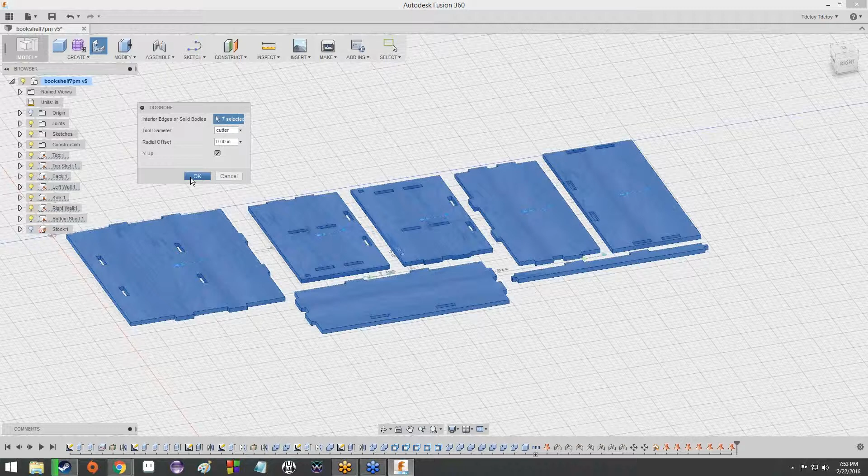Hit OK, and it's going to spend a while doing some calculations. It could be minutes, or it could be a minute, but it could be minutes depending upon your computer. It could take quite a while. So we're just going to let it do its thing, and we're going to leave that to be the last thing we're going to do today.